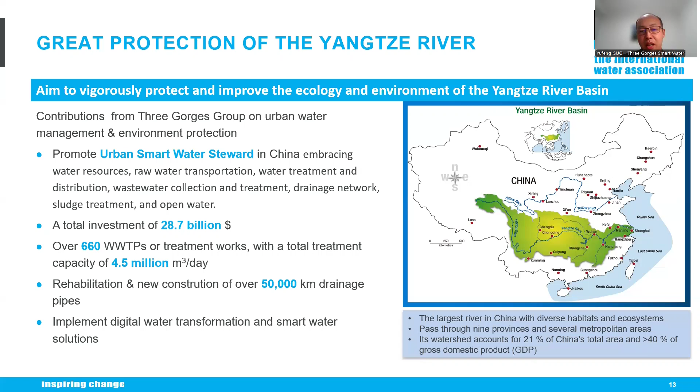Now it covers 55 cities along the Yangtze River. Currently, Three Gorges Group operates 660 treatment plants, mostly on the wastewater side, with a total treatment capacity of 4.5 million cubic meters per day. And we also manage over 50,000 kilometers of drainage pipes.

So this slide basically shows where Jiujiang City is located. It is located at the middle stream of the Yangtze River. Our project covers all the drainage facilities in the central area of Jiujiang City, including 6 wastewater treatment plants, over 40 sewer pumping stations, around 1,800 kilometers of drainage pipes, 1 sludge treatment plant, and 6 regulation reservoirs. And the service population is around 3 million.

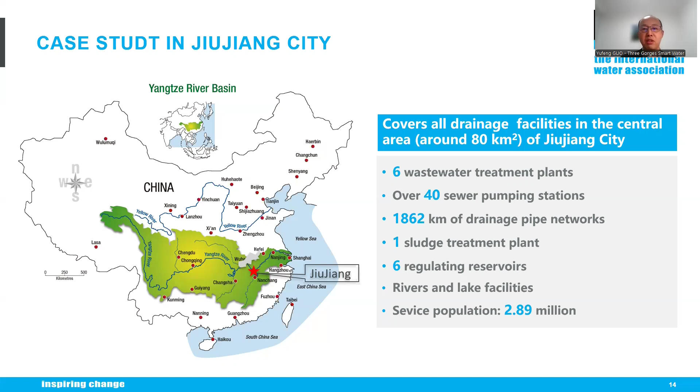But today I only talk about the digital water transformation of the water utilities at Jiujiang associated with those water facilities.

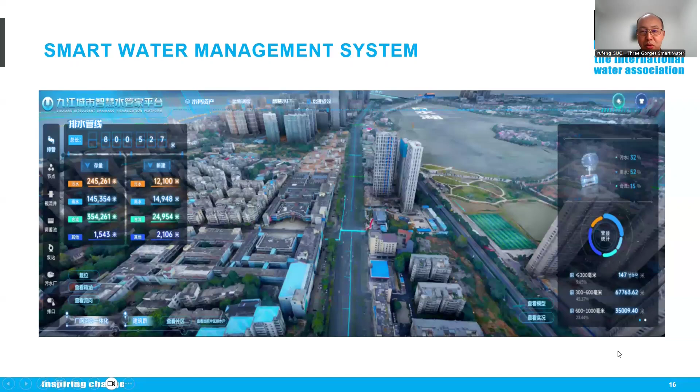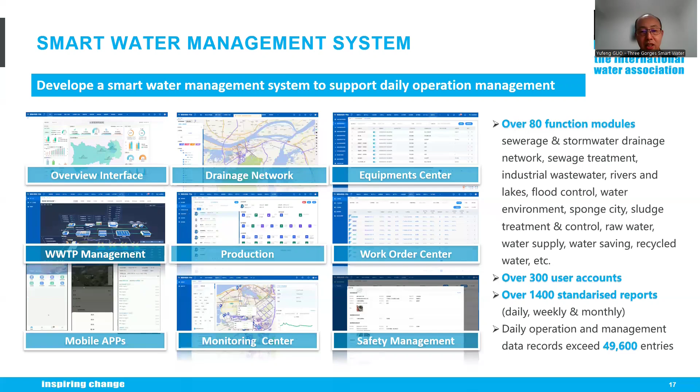We also produced over 1,400 standard reports for the operation and management of the water utilities. Those reports greatly improve the efficiency of daily management. Previously, before we developed these systems, water utilities only used manually filled tables, forms or reports for daily reporting. So it's really a big improvement to have standardized reports. And daily operation and management data records exceed around 50,000 to 60,000 entries per day. That's really huge as well. As Oliver previously mentioned, now we have more and more data, so how to manage this data is also an issue for the water utilities in the digital water transformation.

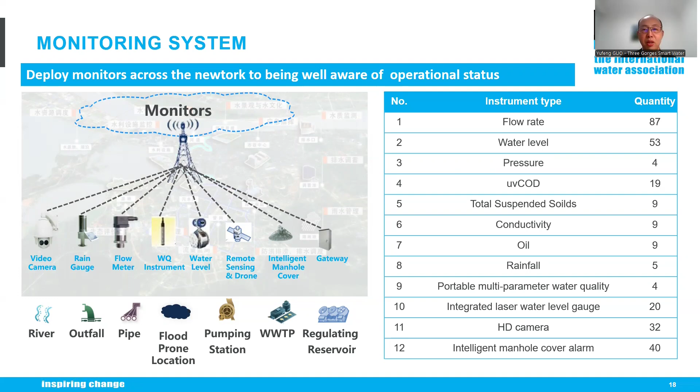This is basically the monitoring system we developed and deployed for this project. We have video cameras, rain gauges, flow meters, water quality instruments, water levels, remote sensing, drones, intelligent manhole covers, and gateways. We installed these instruments at rivers, outfalls, pipe networks, flood prone locations, pumping stations, water treatment and regulation reservoirs, etc. On the right, I list all the monitors we installed so far. We will continue adding more monitors. We noticed that the monitors we installed so far are not sufficient, and when new demand arises, we will install more and more monitors in the system to support our daily operation and management.

I also want to mention the intelligent manhole cover alarm. We have some equipment installed underneath the covers. If there is an unauthorized opening of these covers, it will immediately send an alarm message to the control center, and inspection staff will be sent to the site to check what happened and make sure the covers are managed properly.

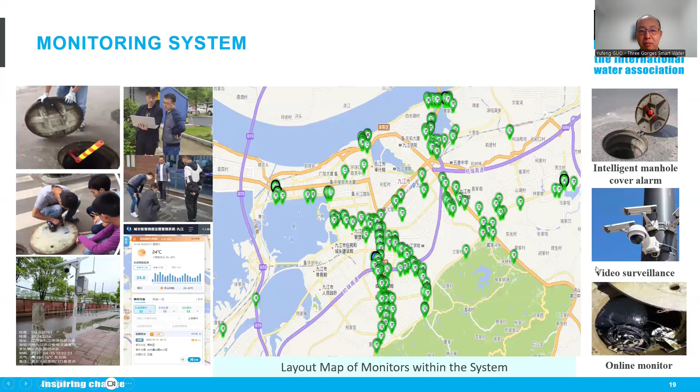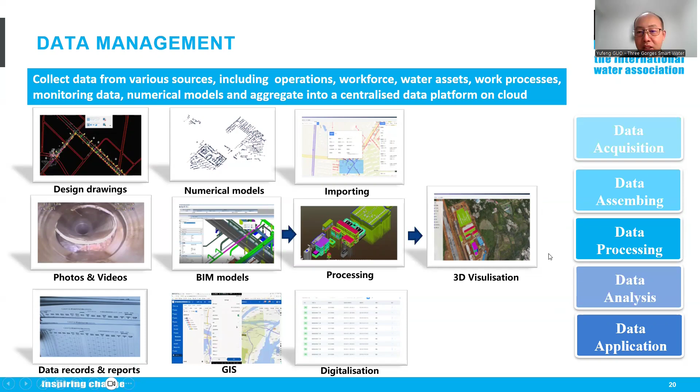They have to import or submit all their survey data at the site. Once they submit it, it will be sent to the control center, and in-house staff will do the checking. We also developed some automatic checking algorithms, but above that, we also have manual checking as well, to check the data quality. Only data that passes the quality checking will be fully imported into our database.

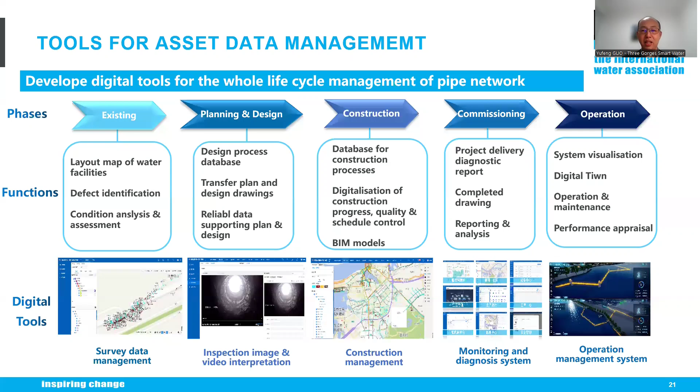The fourth tool we developed is for monitoring systems. Finally, another tool is an overall and integrated operation management system. Basically, all those previous tools are embedded in or have connections with these operation management systems.

We also developed modeling systems embedded in these management systems. We use the simulation engines SWMM and LISFLOOD. Because these are open source, we did some further development to merge these two engines together, and also used APIs to connect with the management systems, so we can trigger the simulation from the system platform.

After the simulation, all the results can be sent to the platform and presented there. These models run as online continuous simulations, 24 hours a day, 7 days a week. It's also linked to the latest monitoring data and operation data. We use monitoring data to update the initial condition of the next model run, and input operating data to tell the model what operations have been done, to make sure the model can properly represent what happened in the systems.

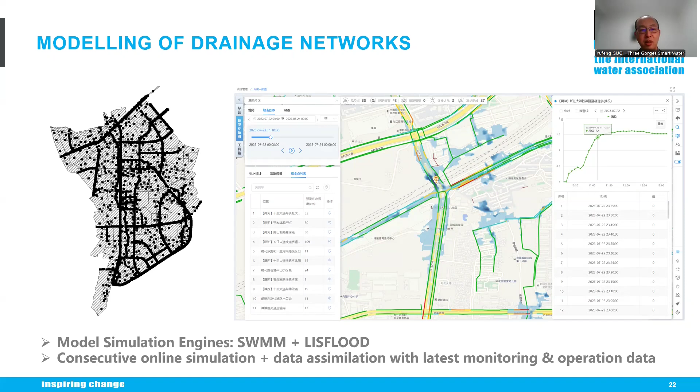Continuing to talk about the modeling, we also use this model to incorporate rainfall observations, like I presented in an example of a rainfall event. We also have radar rainfall forecasting data. We import meteorological forecasting data into the model to do flooding forecasts or overflow forecasts for the combined systems.

On the left side, you can see the squares, which basically cover the coverage of the data for radar rainfall forecasting. All the orange dots indicate locations of rainfall gauges. So basically, we combine the observation of rainfall with the rainfall forecasting data.

The modeling results, observations, and video records are checked online as well, to check each other and see the accuracy of the data and the model, and to make sure we understand what happened in the systems. Based on the simulation results, we have already developed some scenarios for dispatching, so we can send trucks, pumping trucks, or staff to the site to deal with the problems and try to eliminate them as soon as possible.

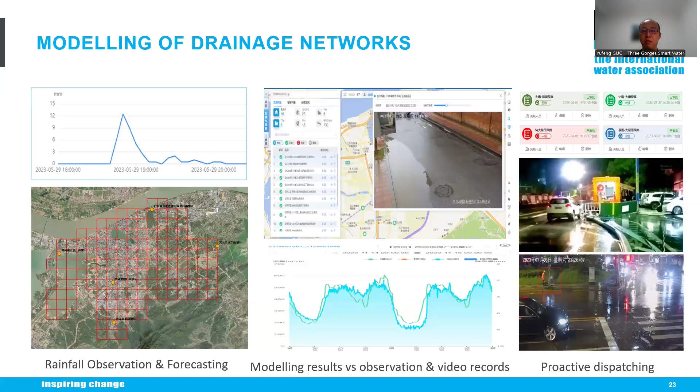Based on those, we also come back to talk about the digital twin of the drainage network. We put all those functions embedded in the systems, and we developed the digital twin systems, especially for the 3D representation of this entire network city.

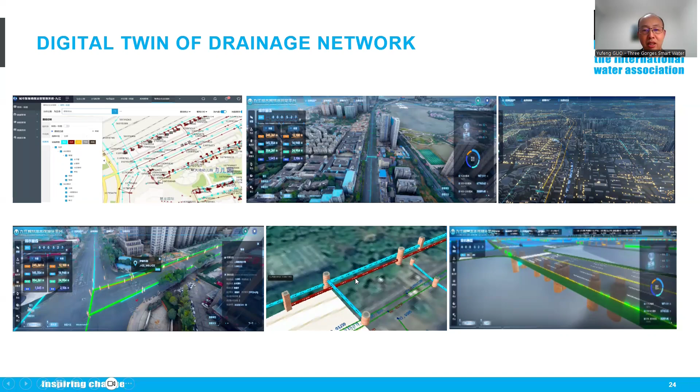So you can see this is the manholes and the pipes, both the storm water pipes and the brown ones are the sewer pipes. We not only work on the pipes, we also work on the treatment plants and pumping stations, all the facilities.

This is a small wastewater treatment plant, fully designed, constructed and operated by 3 Gorges Group. This is an underground treatment plant with a capacity of 30,000 cubic meters per day. It has 2 underground layers. On the ground, it's a public park open to the public, so everybody can come to visit. But underneath this park, it's a treatment plant.

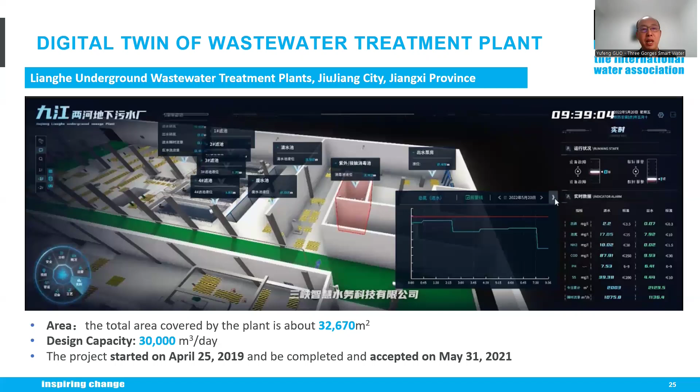So we developed a digital twin system for these treatment plants. All the facilities and processes of these treatment plants have been incorporated into this system. We also incorporated daily operations functions like work orders, inspections, video cameras, monitors, and so on. All the functions we think are useful and available to support daily operation, we incorporate into these systems.

This project started in 2019 and finished in 2021.

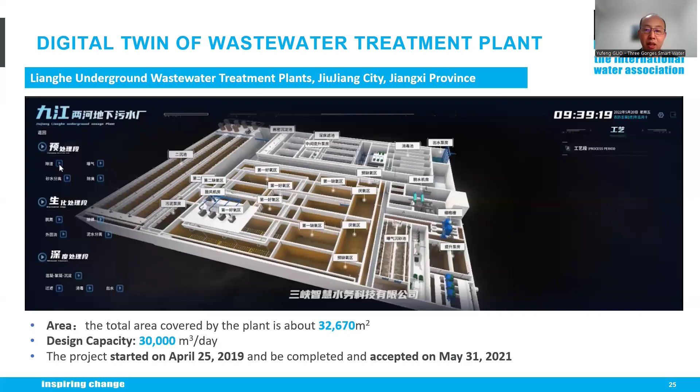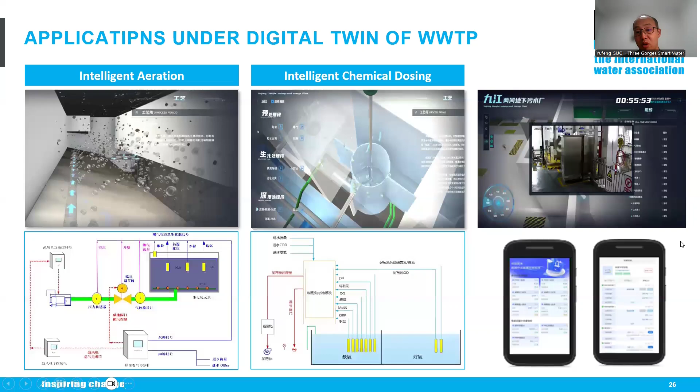As I mentioned, we not only developed a 3D visualization of this treatment plant, we also developed other functions like intelligent aeration, intelligent chemical dosing, and video cameras that check if any alarm should be sent to the central control center. We also developed apps for the staff at the wastewater treatment plant. Basically they are the same systems, but the staff can work on the desktop and on mobile apps as well to control the process.

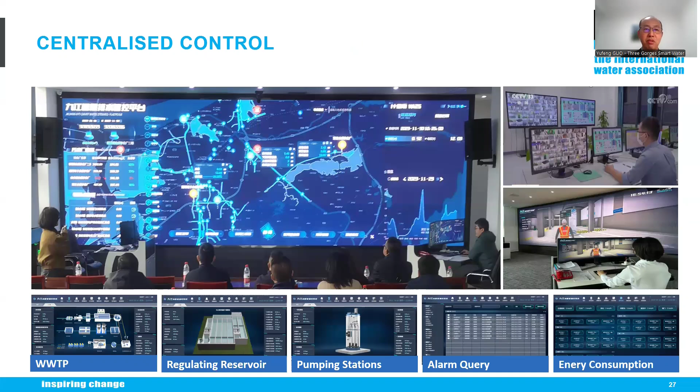Finally, I'll do a summary of the achievements of this project. It has a 38% improvement in operational and maintenance efficiency, a 26% improvement in energy efficiency, a 60% reduction in maintenance failure rates, and 80% of process operations and safety training are currently based on digital twin application technologies. There are also 6 successful cases for pollution source tracing and source pollution control.

This control center, we also use it as an educational resource for the public. On average, every year we receive visitors to this control center from very different backgrounds, including government, students, and even the general public. More than 10 patents and over 40 software copyrights have been developed based on this project. So that's all for my presentation.

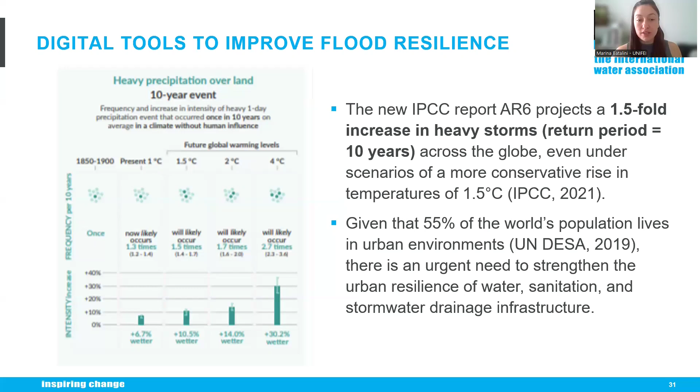So given that 55% of the world's population lives in urban environments, there is an extremely urgent need to have adaptation plans to strengthen the urban resilience of water, sanitation, and specifically stormwater drainage infrastructure. This is not only for one place or another, one country or another—we can see by the projections that we will have an increase in heavy precipitation in almost all places across the globe.

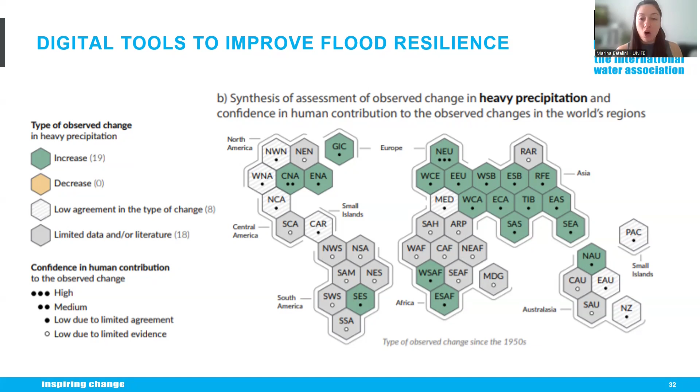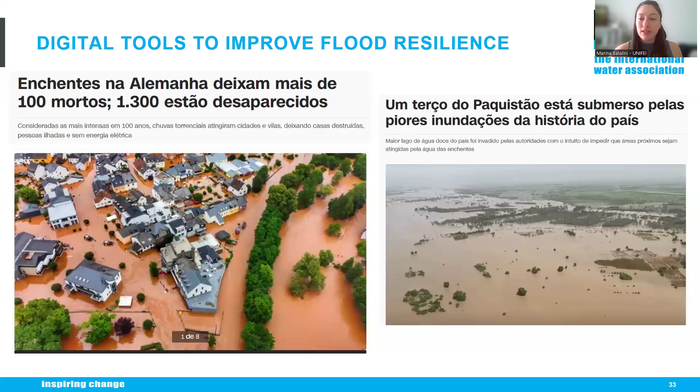And we have already been feeling this for some years. These are news reports from here in Brazil, in Portuguese, but I will translate for you. These are images from the floods in Germany in 2021, which left more than 100 people dead and thousands of people missing. Also, remembering the huge flood in Pakistan in 2022, which left about a third of the country underwater.

We also have, as of about a week ago, and still ongoing, major floods in Spain, which have left a lot of dead people as well, and chaos in the country with a lot of loss in terms of infrastructure. So this is a really important topic we have to discuss, and we have to create alternatives on how to deal with it.

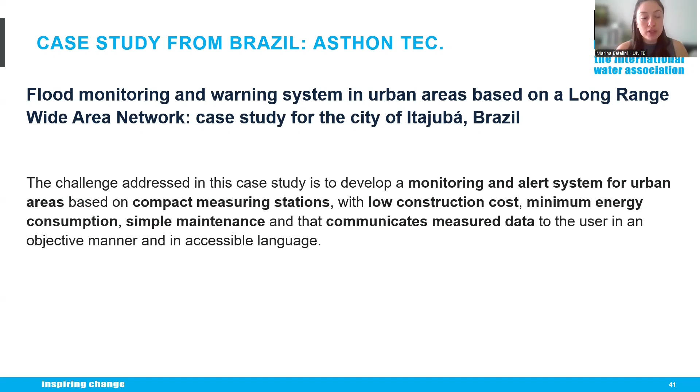The challenge that we have addressed here in this case study is to develop a monitoring and alert system for urban areas that is based on compact measuring stations that have low construction cost, minimal energy consumption, and simple maintenance, and also that can communicate the measured data to the user in an objective manner and also in an accessible language. So I'm going to be discussing each one of these challenges here.

So the first one is about the monitoring and alert system for urban areas. And when we are talking about creating a system to warn people about the flood disaster itself, we cannot just have rain gauges or flow meters anywhere. We have to think about this strategically, because we know that different places in the city will have different hydrological responses to the rainfall and even for the flood wave.

So this is a first step that this project has done, that is actually having a hydrological study of the basin to choose the better places and the most strategic spots. They actually installed the rain gauges that would be able to provide the best response in terms of spatial variation of the rainfall, and also in terms of the hydrological response.

So sometimes if the rainfall falls downstream of the basin, for example, it would not have the same effect as if it was on the upstream of the basin, and if it was also in a place that is highly urbanized. So this is important for us.

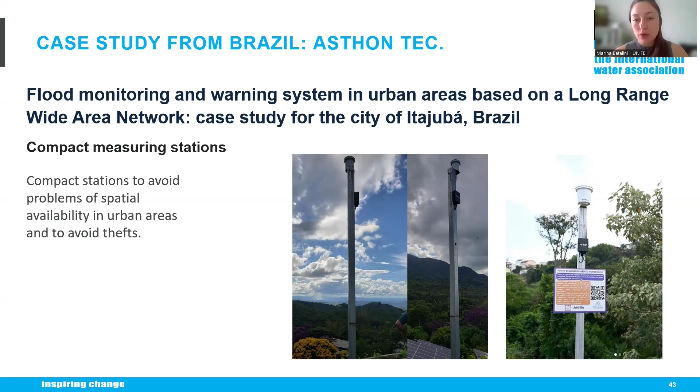So it's important also to have these discreet measuring stations, so it will not be a focus for thefts. And also a different thing that they are doing is trying to create these advertisements and explain to the population what these measurement stations actually are and why they are important. So we can also create education in terms of flood preparedness.

The other aspect that we have faced here a lot also was the low construction cost, the minimal energy consumption, and the simple maintenance. So these were challenges. These are actually really high challenges, because the urban areas require different temporal scales, and usually we are talking of less than 10 minutes. In terms of each minute would be the best option, because the hydrological response in urban areas is usually in terms of 10 to 30 minutes.

And this requires a lot of memory and energy consumption, and hence this leads to high costs. So this was actually a great concern in terms of how can we develop a system that has this ability to acquire a lot of data and also does not require a lot of energy.

Another challenge that we have faced here is that the flow and depth meters are usually really costly, and they have, I don't know exactly how to say this in English, but a closed communication. For example, if you have a sensor from a company, it would only be read by a data logger from the same company. So this is a problem, because usually this leads to high costs in terms of operationalizing the entire system as well. This was a challenge we were facing, because a lot of the flow and depth meters that the municipality or even the university have were from these companies with closed communication.

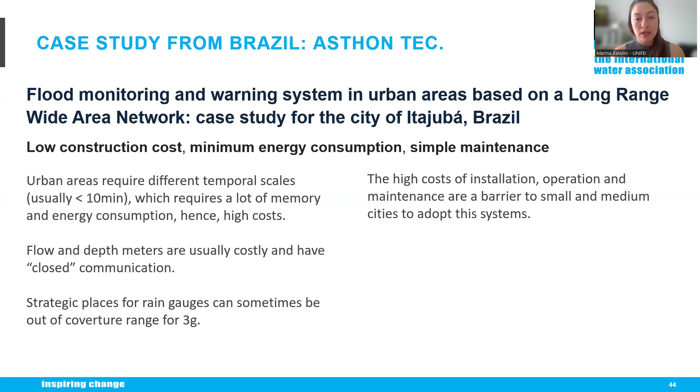And also the high costs of installation, operation, and maintenance are a barrier to small and medium cities to adopt these systems, because these small and medium cities usually have low budget for everything, and they would prioritize, for example, education, health, and other things, even sanitation, and not preparedness plans for flood mitigation. So it's important for us to have as low cost as possible on the systems, so they can actually be implemented by these small and medium cities that have budget constraints.

This is a module that is extremely compact and has really low energy consumption. It requires only a small battery, and this small battery can last for a month without needing a solar panel for recharging. So this is really, really good in terms of energy consumption. And also this module in the circuit board can be connected with no matter what sensor. So they were also able to break the proprietary protocol, as someone mentioned here in the chat, to connect these to the circuit board.

But even though they were able to break this proprietary protocol, one important thing is that they prefer to use sensors that are nationally manufactured and also low cost. And this is important in terms of flood management, because the sensors are usually really high in cost because they have really good precision in terms of how many centimeters they can read, etc. But in terms of flood management, we don't actually need a lot of precision. The most important thing for us is to understand the pattern of the flood wave, for example, whether it's going to actually flood or not, and where the areas are that are going to be affected.

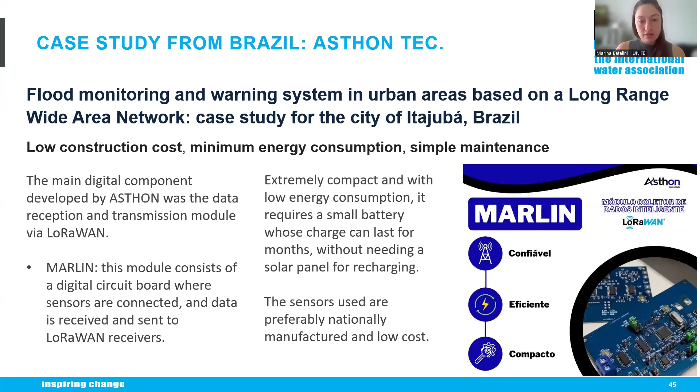So this is a really important thing when talking about flood management as well. And this system is also really simple to maintain, and the ASTHON company will also provide all of the maintenance that they need.

This is important because when the user is looking into the data, sometimes they don't actually know if half a meter, 1 meter, 2 meters are low or high, and this will also vary for each different basin. So it's important to have a communication that is easy to understand. If people look into it, they know what level of alert they are talking about, not only the raw data in terms of the level of the river. And it's also possible to set the viewing period and see numerical data as well, if you don't want to see only the alert thresholds.

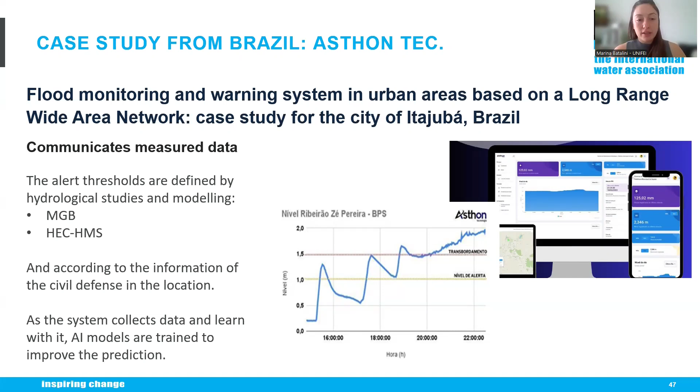And as the system keeps collecting data since it was implemented, and we have the civil defense telling us if it was actually flooded or not and where it was flooded, the system learns by itself with this data. So we have an artificial intelligence model that is trained to improve the prediction as the system collects the data itself.

So the entire development of the system is based on several years of cooperation between these team members and the municipal civil defense teams. And this is really important because you have to construct the system to actually help with the municipality's deficiencies and needs. And this would only be possible with this collaboration between academia and the municipal civil defense teams. This is a tool that is still in development. It requires continuous improvement. Also, its success will heavily depend on the collaboration and trust of the civil defense members and other agents involved in the system.